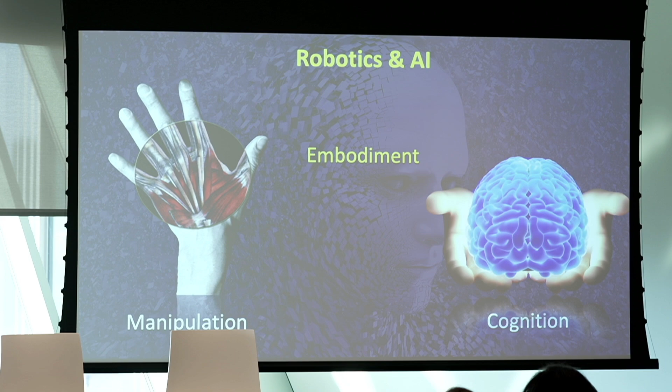This is a very important concept which people in robotics and AI are studying - the concept of embodiment. So embodiment means that not only do we have a sort of neuronal cognitive intelligence, but also we have a sort of physical intelligence. And you probably saw this video about ChatGPT.

Sam Altman is the guru of ChatGPT. When OpenAI, the company that introduced ChatGPT, was founded like 3 years ago, there was a statement that the challenge for OpenAI was merely on cognition and not on manipulation, because physical intelligence was judged too complex to tackle. In a time lapse of 2.5 years, the scenarios changed. Why? Because this video shows the very first attempt to create a sort of generative AI, like ChatGPT, which would be able to support physical action.

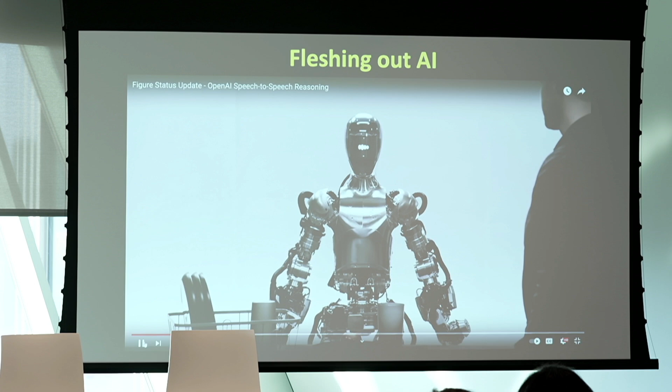Hey figure one, what do you see right now? I see a red apple on a plate in the center of the table, a drying rack with cups and a plate, and you standing nearby with your hand on the table. Great, can I have something to eat? Sure thing. Great, can you explain why you did what you just did while you pick up this trash? On it - so I gave you the apple because it's the only edible item I could provide you with from the table. Great, so based on the scene right now, where do you think the dishes in front of you go next? The dishes on the table, like that plate and cup, are likely to go into the drying rack next. Great, can you put them there? Of course. All right, so how do you think you did? I think I did pretty well - the apple found its new owner, the trash is gone, and the tableware is right where it belongs.

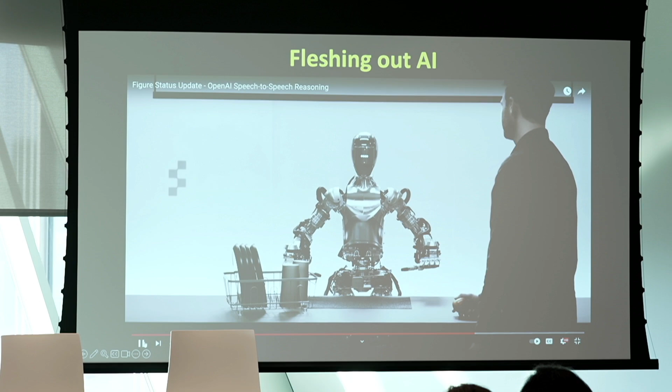Because of this, together with a colleague and friend from University of Pisa, Antonio Bicchi, we published a comment in Nature like 3 years ago about the transition from the era of ICT, information and communication technology, to a new era, the era of interaction technology, where the acronym is intentionally made of 3 letters to disambiguate from IT, information technology, while sharing the same initial as interaction technology, but also to stress the importance of physical action.

And this is very much in line with the current program of Industry 5.0, or if you wish Society 5.0, Agriculture 5.0, because besides the two buzzwords that our politicians use, which are resilience and sustainability, the most important issue is the upper vertex of this triangle - the human at the center of the technology.

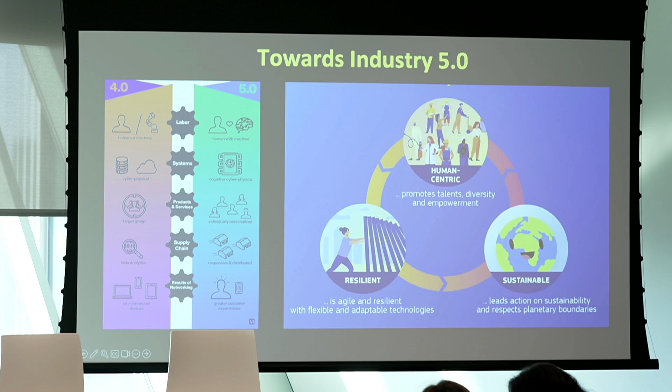So the transition from Industry 4.0 to Industry 5.0 is not only targeting groups of users, but also the individual user, to promote talent, to promote diversity. And in this scenario, communication also plays a very important role.

So if you take an image or a video, apart from the artistic component of the photographer or filmmaker, basically the parameters identifying an image are absolute. Whereas tactile perception is something very personal, very emotional, and it varies from one human to the other.

So this is a transition from the Internet of Things to the Internet of Skills. This time it's not only the data, not only the things, it's also the human skills, which are associated with the individual human. And thanks to 5G technology, we'll be able to develop the concept of 5G-enabled tactile internet.

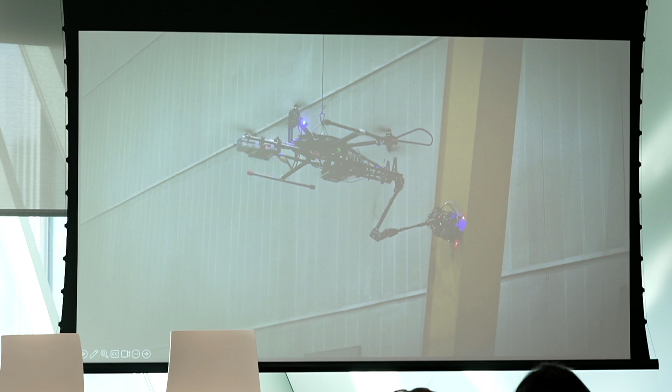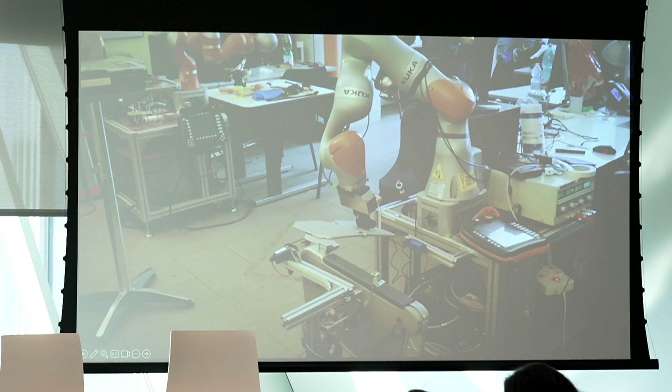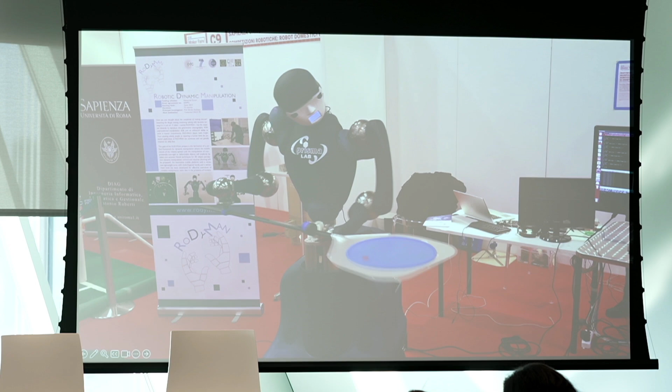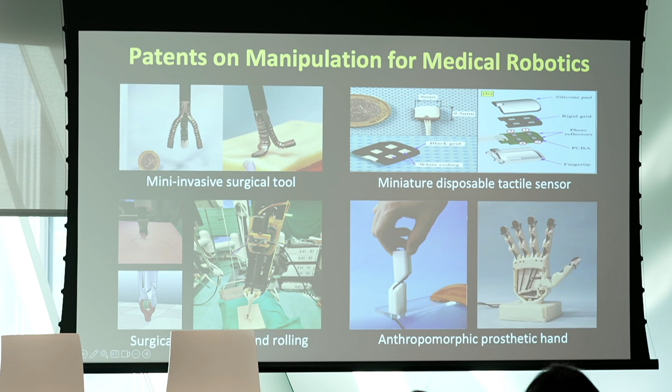There's also another patent about a miniature disposable tactile sensor, and one more about an anthropomorphic prosthetic hand.

The story about aerial robotics is quite funny. I remember in 2009 I got a phone call from a friend and colleague at Alma Mater University of Bologna, Lorenzo Marconi - Giuseppe knows him quite well. Lorenzo called because he wanted to get us involved in a project on aerial robotics, since we were good and expert in visual servoing.

And the people in my team said, no, we know nothing - we're not aerospace engineering, we know nothing about aerodynamics. But the beauty of robotics is that it's very interdisciplinary.

Believe it or not, since 2010 we got 8 projects funded on aerial robotics at European level. The acceptance rate is less than 5% nowadays, so there's no team in Europe that got so many projects. This is really my 'keep the gradient' philosophy - you have to challenge yourself, you have to really tackle new challenges. And so was the case for aerial robotics.

So 4 patents came out of this work. One is a hybrid drone for ultrasonic pipe inspection, which is quite interesting because one of the caveats of aerial robotics technology is autonomy - it's batteries. So here the idea is to land on the pipe and save energy.

Similarly there's a drone for inspection and maintenance of high voltage power lines, in which we exploit the magnetic field of the power lines to get a sort of 24/7 working system, getting energy and automatic recharge at a station on the power lines.

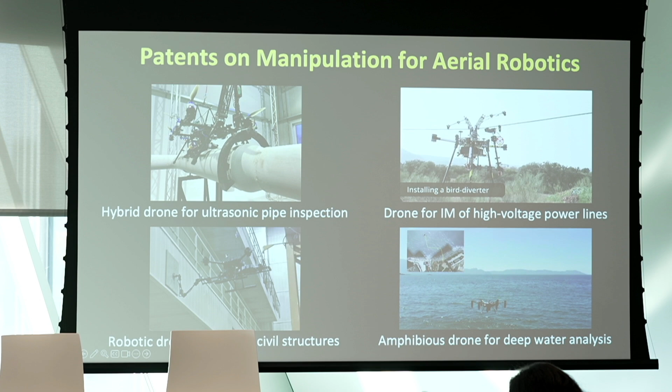There are also other robotics teams at UNINA worth mentioning - robotics is so pervasive, so transdisciplinary. Yesterday we had a wonderful presentation by our friend and colleague Cristina Mele about the use of social robotics. Social assistive robotics is also the field of investigation of the Prisca team, led by Silvia Rossi, now a full professor in our department of computer science, tackling issues like human and context awareness, personalized service robotics, social assistive robotics, and speech dialogue systems.

There's also an active group led by Professor Antonio Lanzotti in the Department of Industrial Engineering - the IDEAS lab - with research areas including additive manufacturing, fusion engineering and design, soft robotics, and sports engineering.

Now, what is the impact in terms of technology transfer? I have to say, as an Italian, that we are lacking a true entrepreneurial culture. 3 weeks ago I was in an audition at Palazzo Chigi with the government, called by the Golden Power Group, which took me as an expert to give an opinion about the acquisition of Comau by some equity partners in the US.

You probably remember that KUKA, the leading European robot manufacturer, was purchased by the Chinese 4 years ago. So there is no major robotics manufacturer in Europe any longer, because ABB is Swiss. And Comau was the last one.

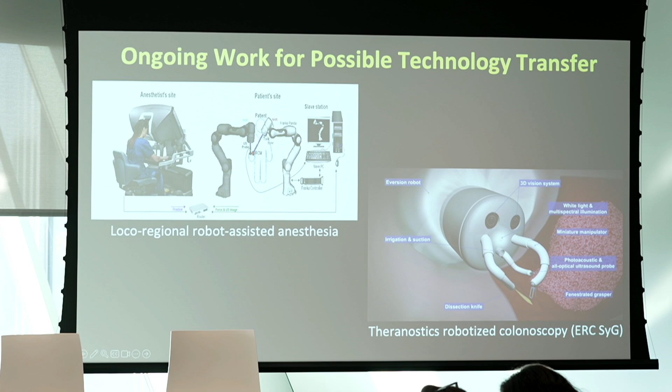Thank you very much indeed for your kind attention. Thank you.